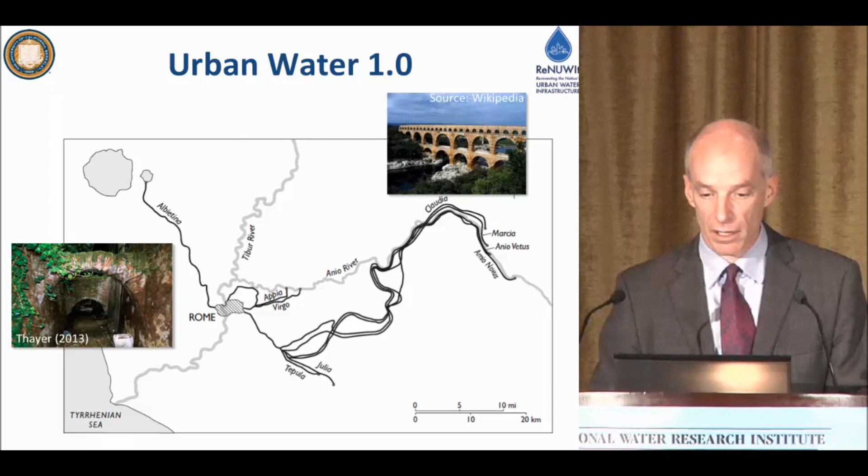When the world started getting wealthy, about 12 or 13 centuries later, they turned to this same approach of providing urban water services. So when London and Paris started growing in the 19th century, or maybe more relevant for our discussion today, when the United States started growing in the late 19th and early 20th century, we turned to the same approach of imported water and sewers.

Think about New York City and its wonderful gravity-fed water supply, with the Catskills and Croton watersheds delivering water to the city, and sewers following the Roman model, discharging waste into Long Island Sound and the Atlantic Ocean. That's very similar to the Roman system, but on a much grander scale.

On an even grander scale is the western United States, exemplified by the Colorado River, where you have the Central Arizona Project and the Colorado River Aqueduct providing water for a lot of the people who live in the American Southwest. So there's an incredible upscaling of this first version of urban water, but it wasn't all that different from the system the Romans developed.

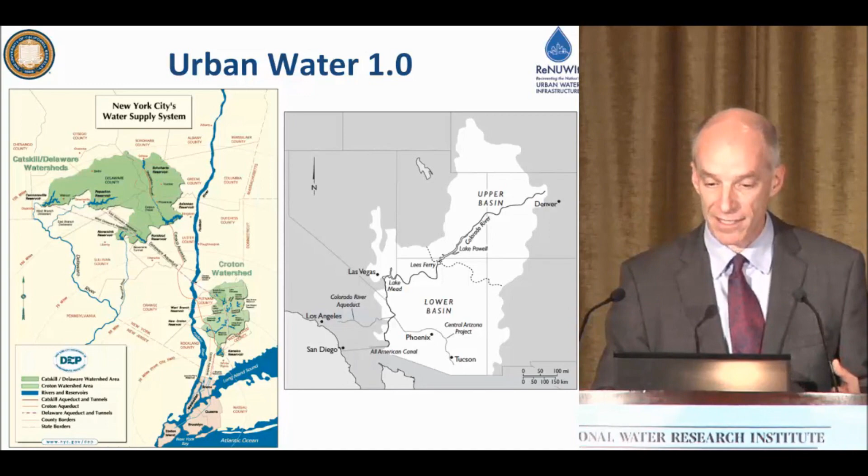So: water supply, sewage disposal, water supply, sewage disposal, water supply, sewage disposal. Eventually this becomes too dense, and the sewage disposal for one community becomes the water supply for the next community downstream.

The next version of urban water infrastructure was designed in response to the fact that people's drinking water intakes were very close to other people's sewage outfalls. There was no sewage treatment, no drinking water treatment - the upstream community discharges to the river, and the downstream community gets sick. The best example is the towns of Lowell and Lawrence on the Merrimack River in the United States. Lowell, the upstream town, discharged its sewage into the river about 15 miles upstream of the drinking water source for Lawrence, and people got typhoid fever. This was a common occurrence in the United States and parts of Europe at the end of the 19th century.

This newspaper article from the New York Times, dated 1891, shows that people realized there was an epidemic. The town of Lowell was able to find a clean water supply that wasn't contaminated by sewage, but the town of Lawrence had no such alternative available to them.

So in desperation, they did what desperate people often do - they turned to academics. The academics they turned to were the Lawrence Experimental Station, MIT's experimental station established in Lawrence, partially because it was a great place to study this problem. People like William Sedgwick, the first sanitary detective if you will, helped figure out the source of the disease outbreak. And people like the prodigy Allen Hazen, who helped pioneer slow sand filtration, developed a system for treating water.

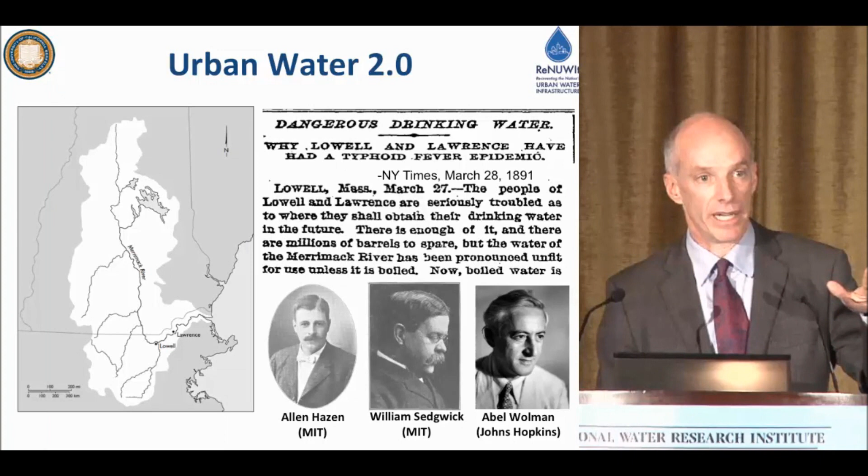Everything proceeded well until people realized it wasn't enough just to treat drinking water - all the sewage going into rivers was causing problems so bad that cities were no longer nice places to live. Near me, near Oakland, the town of Alameda saw people move away because sewage from Oakland, Berkeley and the East Bay Hills was dumped into the mudflats by the Bay Bridge. It became so hard to live with the smell of hydrogen sulfide and sewage that a solution was needed - and that solution was sewage treatment.

Activated sludge treatment - early research was done by an academic, Gilbert Fowler at the University of Manchester, who was influenced by what he saw at the Lawrence Experimental Station. This resulted in good systems for treating sewage, whether trickling filters or activated sludge treatment plants, which largely alleviated the aesthetic problems of fish kills and hydrogen sulfide associated with raw sewage discharges.

Other researchers and academics like Charles Gilman Hyde also contributed - I wasn't able to find a picture of Professor Hyde, but this is a picture of the original civil engineering building at UC Berkeley. I think it got knocked down long before present times, but you can see it here. There were a variety of people who helped spread this idea of sewage treatment as a way to solve urban water problems.

In the late 1960s and early 70s, a window opened. People became aware of the problems affecting the environment - rivers started catching on fire, and people noticed problems like DDT and its effect on top predators. A window of opportunity opened, and the Clean Water Act enabled investment in sewage infrastructure. This figure shows some of the investments made in the United States in sewage infrastructure, to a point where this revolutionary idea, which started slowly in the beginning of the 20th century, spread around the whole country and created a new way of delivering urban water services.

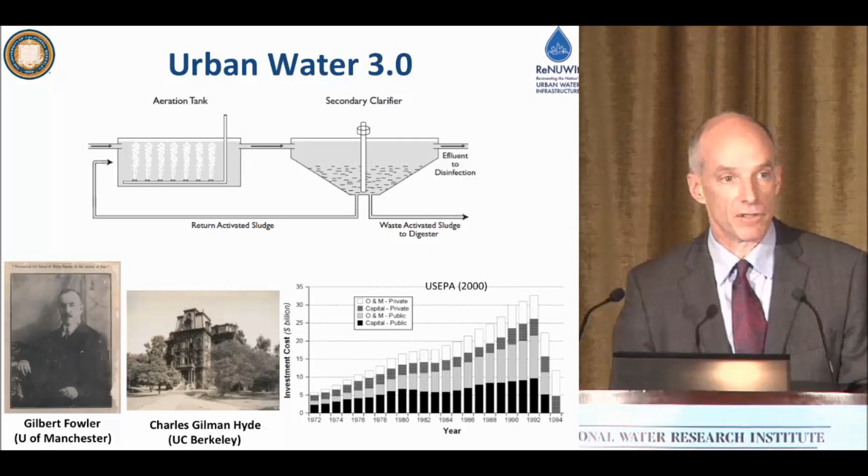So here we are in the 21st century, and I'm making the argument that we're due for another revolution. I want to tell you a little bit about the reasons why I think we're heading towards another revolution.

The first one is climate change. I don't want to steal Jerry Schnoor's thunder, he'll talk to you a little bit later about climate change.

But in a nutshell, the reason climate change is an issue is that it's going to become wetter in the places that are wet, and drier in the places that are dry. This figure here shows a map from the latest IPCC report showing where the changes in precipitation patterns are going to occur. In the western United States, the precipitation patterns that give us our winter precipitation are going to move further north, meaning the southwest and southeast of the United States is likely to become drier.

Australia is likely to become drier. The Mediterranean countries are likely to become drier. Other places are going to become wetter, but there's certainly going to be a water supply issue. You can see here in this figure from last week from the drought monitor in the US, the dry conditions in the US, and maybe some of you remember the dry conditions in Texas last year.

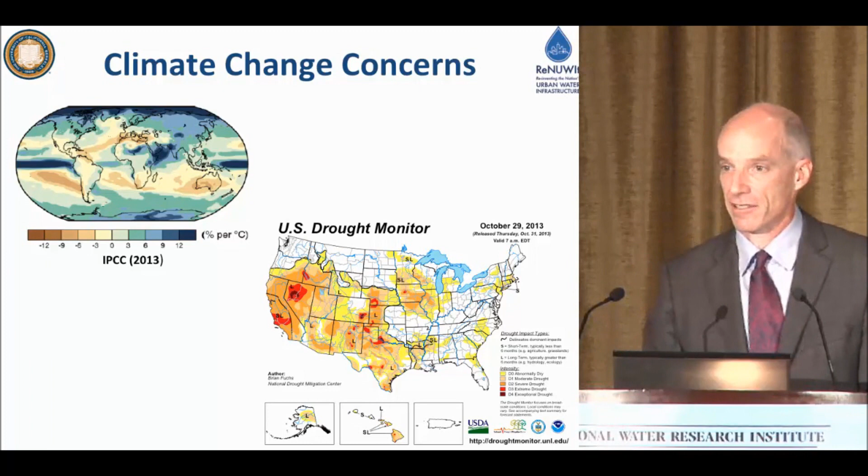Another driver for a change, a revolution in urban water systems, is what I'd characterize as resource considerations.

This map shows you from the U.S. Global Change Research Program population changes, and the map shows in blue the areas where population's decreasing, and in orangey red the locations where population's increasing. What you can see is that in the United States the population's moving to the dry places. It's moving to Florida, it's moving to Texas, it's moving to California and the Southwest.

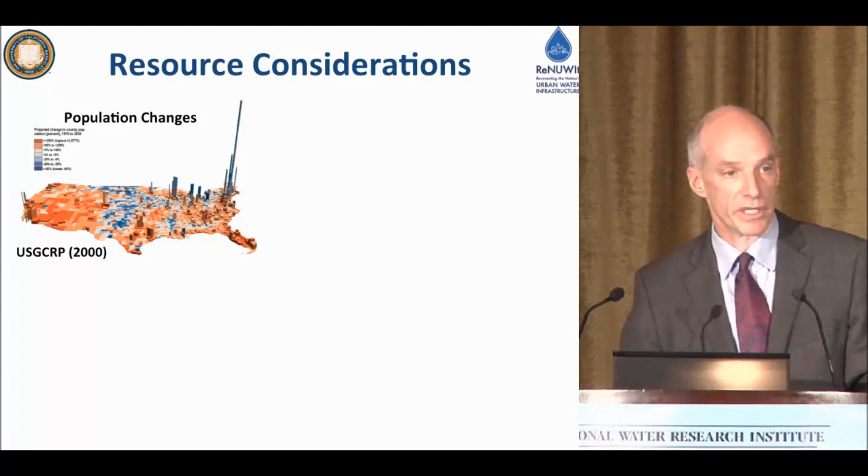There's a new concern, new interest in reducing greenhouse gas emissions. A lot of the urban water systems that were developed during a time when energy was inexpensive and we weren't too worried about carbon dioxide emissions are coming under scrutiny.

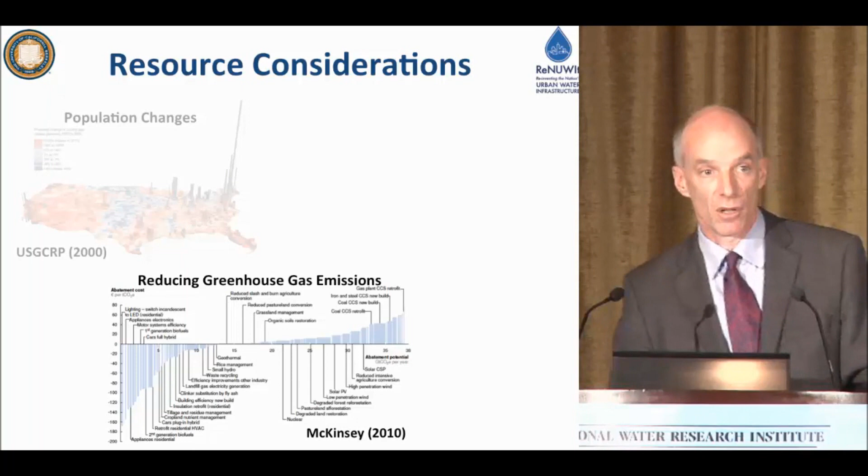This is the famous greenhouse gas cost curve from McKinsey that mainly deals with the energy sector. But we could imagine similar cost curves for the water sector. Suddenly pumping water up into Southern California or up to Tucson, Arizona, becomes low-hanging fruit in terms of lowering our greenhouse gas emissions. If we could reduce the amount of water that we have to pump way uphill, we have ways to reduce greenhouse gas emissions. So there's a good motivation there.

Water supply and sanitation is a public service. It should remain that way, it shouldn't be farmed out to the private sector. And the ultimate objective is to be safe and reliable. I think many of us have built our careers around that objective and take the engineer's approach.

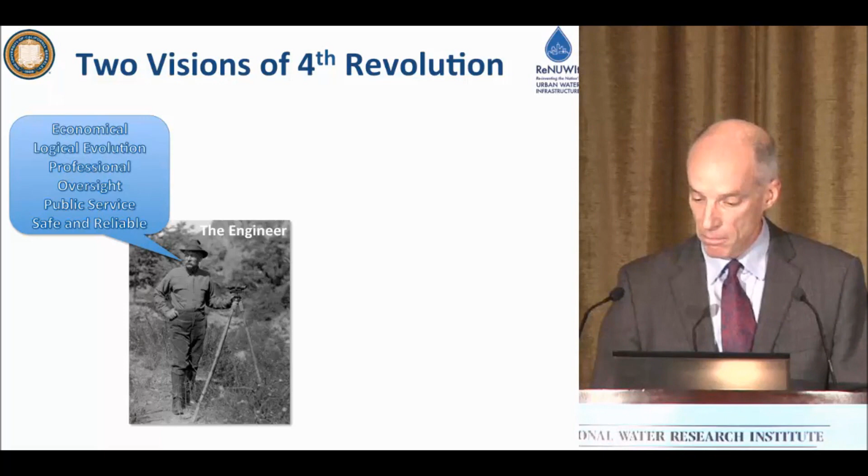But there's this other vision of urban water infrastructure, exemplified by the architect and planner Le Corbusier. This school thinks a little differently. They think the solution to urban water infrastructure issues involves distributed systems, making individual buildings or individual blocks of houses autonomous and able to treat their own sewage and provide their own water. They would advocate for this because it provides a resiliency that you don't see in centralized systems. Instead of thinking it's a logical evolution, they would say it's a much-needed revolution.

They would look towards the grassroots support of the public, and anyone who's dealt with the public on issues like gray water or household water supply and low-impact development would realize there's more support among members of the public for this approach to water than there is for the large centralized system.

They would tout the independence of the system and the fact that it gives people control of their own destiny. And they would talk about its flexibility and its ability to evolve in the future.

So what I want to do is spend a little time showing you primarily this centralized vision and how it's being realized here in California, giving you a few examples of the front lines of the revolution, and what we could expect to spread to the rest of the country through the result of the innovative work of some of the people here in this room and others.

And then I also want to talk about this other view and the ideas that have been proposed, and maybe they're not as far developed, but I want to show you what they are. And I want to end by thinking about how these two visions can come together.

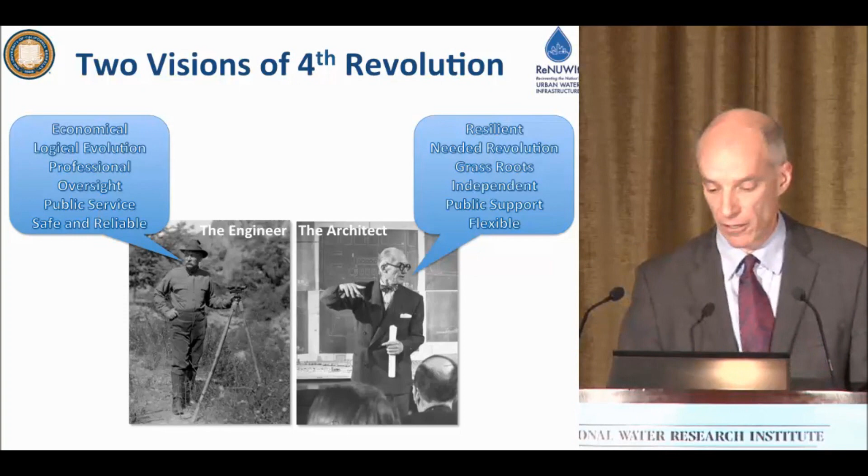So here's the current system that we have. I'd call it Water 3.0, the centralized version. This is what Glen Daigger, the president of the International Water Association, calls the take, make, waste linear approach to water supply. That is, you take imported water into the system, you put it through water treatment, Water 2.0.

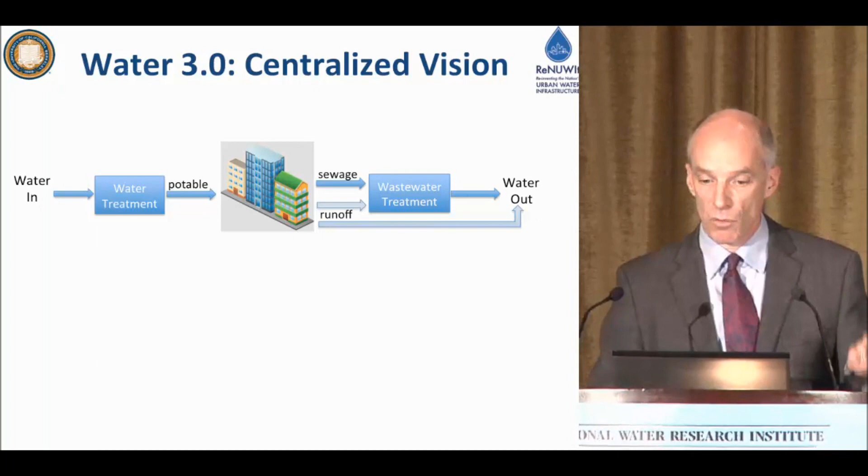You use it in the city, only one flavor of water, potable water, gets used for absolutely everything, and then it becomes sewage. That sewage goes to a wastewater treatment plant, Water 3.0, and then it gets discharged to the environment. And if the city got rain in it, then there's stormwater runoff, and maybe that runoff goes into the wastewater treatment plant, a combined sewer system, or maybe it bypasses the wastewater treatment plant and becomes a separate sewer system.

When we talk about the next version of water, Water 4.0, the centralized version has a lot more arrows on it. It looks a lot more complicated. But the general idea is that water gets recycled in a loop.

So let me show you some of these loops. First of all, we don't call them sewage treatment plants anymore, do we? We call them resource recovery facilities because that's what they do. They recover resources. And sometimes when they recover those resources, they return them directly back to the city as non-potable water, or sometimes they return them to the city as potable water, so-called direct potable reuse.

Or maybe they discharge them to an aquifer, and we manage that aquifer - soil aquifer treatment, aquifer storage and recharge, recovery, whatever you want to call it - and we send it back to the water treatment process and it goes back into the city as the potable water supply, or maybe it gets used within the city for non-potable applications.

And we also could discharge it to managed surface water. We don't just ignore the surface water, but we consider the surface water part of the infrastructure - engineered treatment wetlands, managed hyporheic zones in rivers. These systems become part of the treatment system and can either be used for pre-treatment before going into a managed aquifer, or maybe even like for example, in the Tarrant Regional Wetlands in Texas, into a reservoir for a drinking water treatment plant. That's the centralized version.

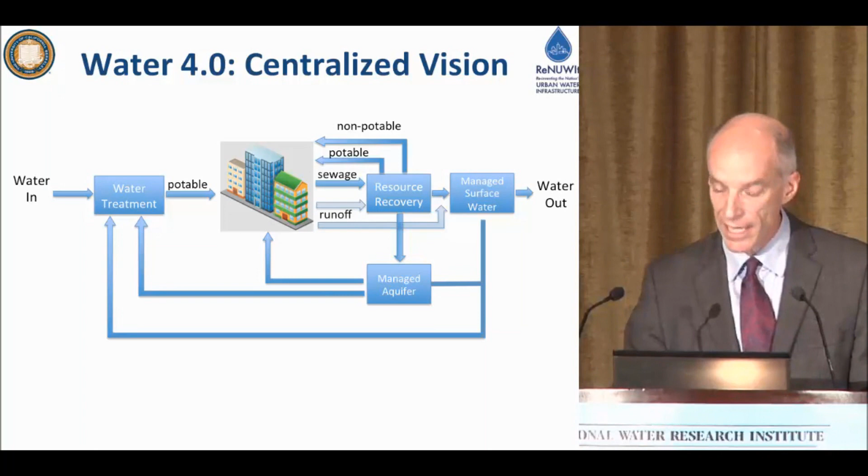Let's see a few examples of the centralized version. Here's an example close to home for me. It's in Oakland. So EBMUD, the local utility - if you've ever driven over the Bay Bridge, it's the treatment plant right in the middle of the cloverleaf there. East Bay Mud, they're not very worried about their water supply.

They have an adequate water supply, but they're looking to recover energy. And they had excess capacity in their anaerobic digesters, and so they got this idea of bringing in organic waste from other industries and other applications and converting it into biogas.

So this figure here shows you the progress they've made in producing energy. By bringing trucked waste, winery waste, slaughterhouse waste, all kinds of organic matter, household compost even they're experimenting with, by bringing that into the treatment plant, they're able to provide about 90% of the electricity they need to run the sewage treatment plant. And they have plans to bring it up to 100%. That's part of this resource recovery part. It's no longer just a sewage treatment plant, it's a resource recovery facility.

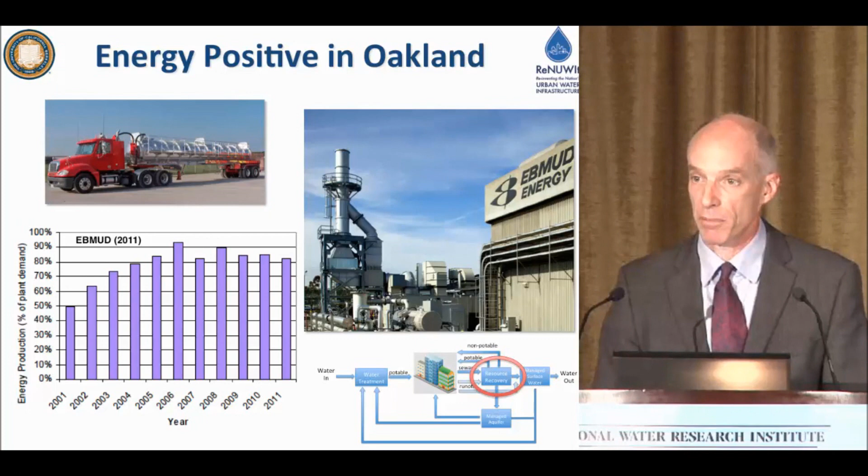Closer to where we are, by the Los Angeles airport, you might find West Basin's Edward C. Little water recycling facility. This is a really interesting water recycling plant that does something I'd refer to as tailored water.

That is, it produces 5 different flavors of recycled water. It produces irrigation water, so-called Title 22 water for landscape irrigation. It produces water after reverse osmosis that can be used for groundwater recharge, but it also produces 3 different kinds of industrial waters. It provides water for cooling towers, and uses reverse osmosis to prepare water for low pressure boilers.

It even produces a little more treatment to prepare water for use in a nearby oil refinery. The interesting part about this facility is that as the needs of different customers change over time, it can change its mix. So it's not held hostage to just landscape irrigation or just one kind of cooling water. If the community needs less landscaping water, that's okay—more water can go to one of the other needs.

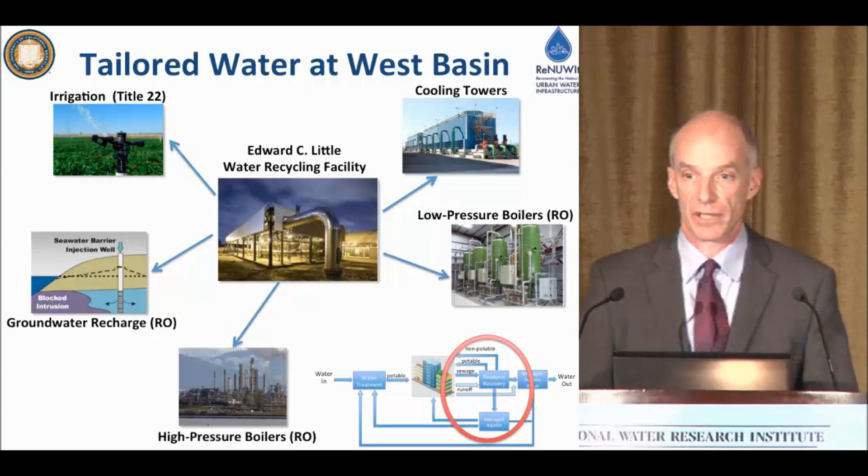Now here, closer to where we are today, is the Santa Ana River, and here's an example of a managed aquifer. Along the banks of the Santa Ana River are the Anaheim Lakes, right about here. What the Orange County Water District does is route water from the main channel of the Santa Ana River into the lakes, and the water percolates into the aquifer.

It becomes a drinking water supply for the nearby community. The aquifer and the microbes associated with the sand during infiltration are part of the treatment process. That Santa Ana River, right there in Anaheim, in the summertime, is essentially 100% wastewater effluent. So it's a potable water recycling project using a managed aquifer as part of the treatment.

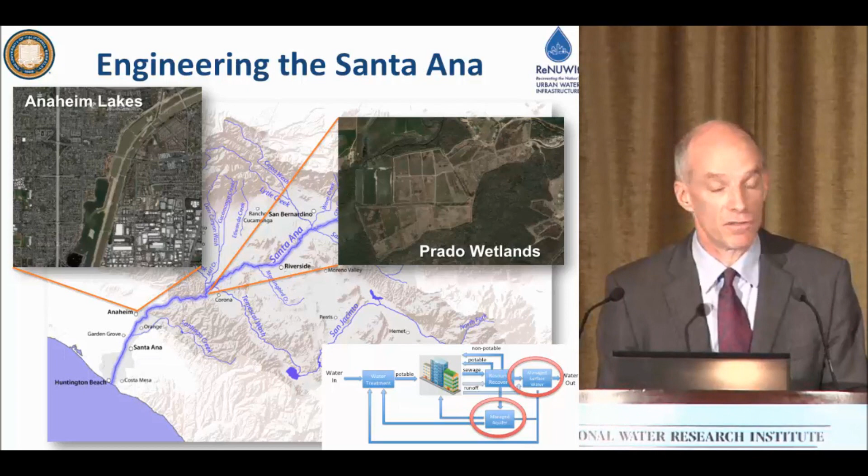Now further up the Santa Ana River, you can find the Prado Wetlands. The Prado Wetlands are an example of a managed surface water. This is a facility that was developed behind a dam, put on the Santa Ana River to protect the lower part of the watershed from flooding, and it became very popular with duck hunters and everything was fine.

But at some point, Orange County Water District realized they were running into problems with high levels of nitrate in the Santa Ana River, because after all, it was the sewage discharge from Riverside, San Bernardino, and the Inland Empire communities. Working with my colleague at UC Berkeley, Alex Horne, they designed a series of vegetated wetlands, and those wetlands did an excellent job removing nitrate. So part of the managed surface water improved the water quality by removing nitrate through denitrification and making the water safe to drink.

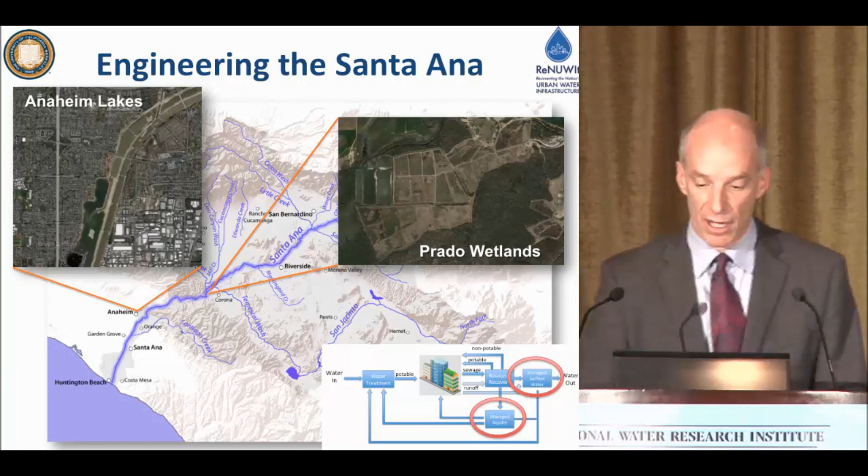We found that if you don't let rooted plants grow and you leave the water at about 30 centimeters depth, photochemical reactions and a unique type of microbial community that develops at the bottom of that sunlit water column do an excellent job removing trace organic contaminants. We were seeing removal of pharmaceuticals and personal care products an order of magnitude better than what we were seeing in the vegetated wetlands.

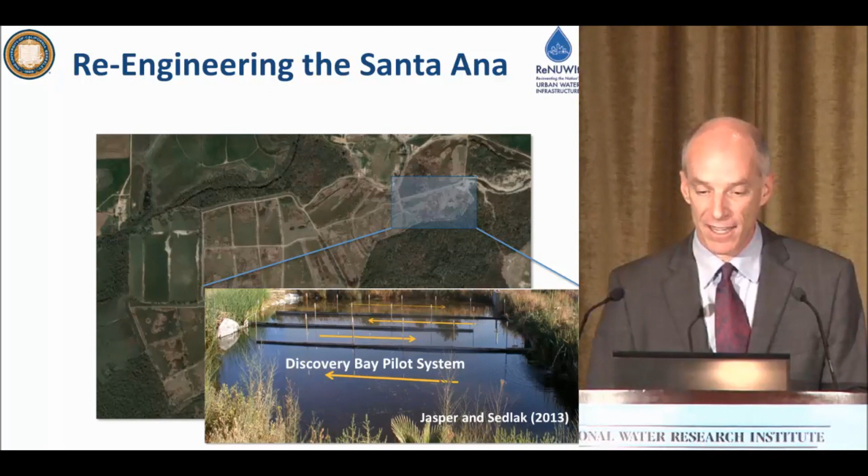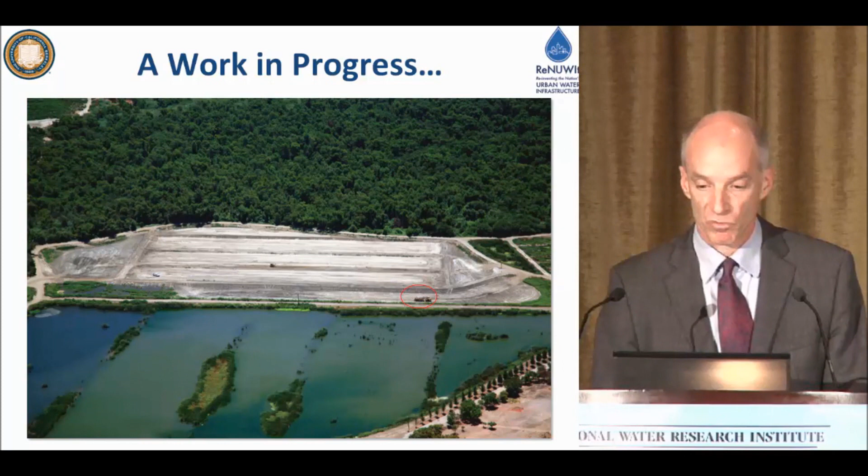I heard just yesterday that this is going to be filled with water on Monday and used as a way for removing trace organics in the Prado wetland system. Okay, let me turn to think about this decentralized version of urban water systems.

When you hear about this decentralized version, you might see something like this. This is the kind of idea that Peter Wilderer pushed, or that Rolf Otterpohl in Germany talks about. You can take a house and make that house an off-the-grid house, and that house can do all kinds of wonderful things for you.

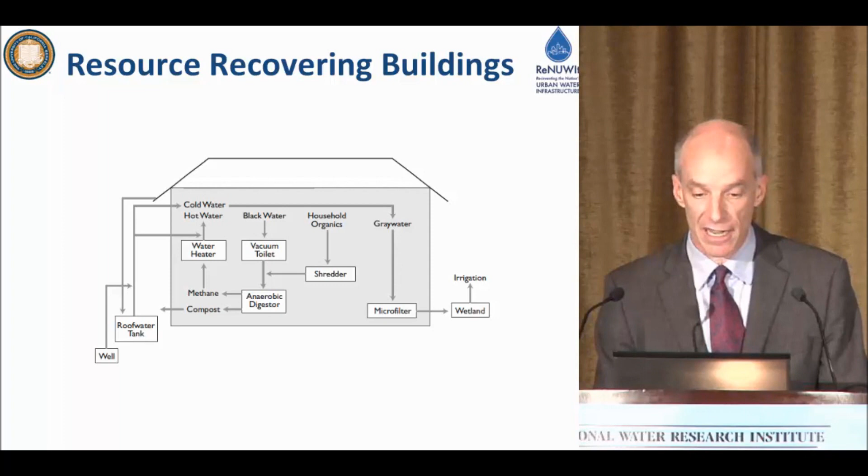For example, you could replace the normal toilet with a vacuum toilet, put the food waste from the house into an anaerobic digester, and in a miniature version of what happens at the East Bay MUD Treatment Plant, make your own biogas.

Let me see if I go backwards here. Somehow that got pushed. Help me.

Somehow it went forward. Sorry, I'll just go with it here.

You can make your own biogas, and that biogas can be used to heat water. Then you could capture the roof water and use it as a drinking water supply. And you can have a separate gray water stream and use that for landscape irrigation. So that's one version of a decentralized water infrastructure where you take a house and take it off the grid and make it work for you.

Those systems are still quite expensive, and people say they may not be practical because you can't get rid of all the water in the wintertime, or you have to put a lot of effort into managing them. But they're one approach for taking a house off the urban water system and having a different vision of the fourth generation of urban water.

Maybe that's a little far-fetched now. Maybe the technology isn't there to build those kinds of houses. Here's something a little more practical and down to earth: this is a membrane bioreactor. In the center of this figure, you can see... oh, golly.

This is a membrane bioreactor that's being operated at Colorado School of Mines by our colleagues Tzahi Cath and his students for a while now. That membrane bioreactor treats the wastewater from a student dormitory.

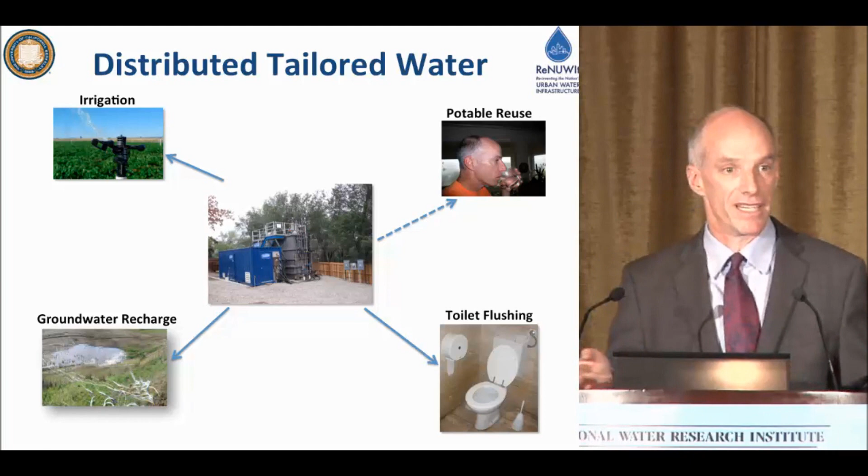So what you have there is a vision of breaking the house off the grid and doing all the kinds of things we do in the large centralized system, but in a smaller footprint. And that has real advantages because you don't have to pump the water around the city crazy distances. You could reuse it right where it's produced.

The other kind of distributed water infrastructure we hear a lot about is green roofs, or green streets, or low-impact development. Whatever you want to call it, it has a lot of applications and a lot of proponents. In the eastern United States, the upper Midwest, and the Pacific Northwest, where there are a lot of combined sewer systems, instead of building sewage bypass tunnels, people have been investing in bioswales, green roofs, and cisterns that collect water.

Instead of taking a centralized approach to solving the problems of combined sewer overflows, this distributed approach can be used. Sometimes it's more expensive and sometimes it's less expensive, but in all cases it has a lot more public support than digging big concrete tunnels throughout the city.

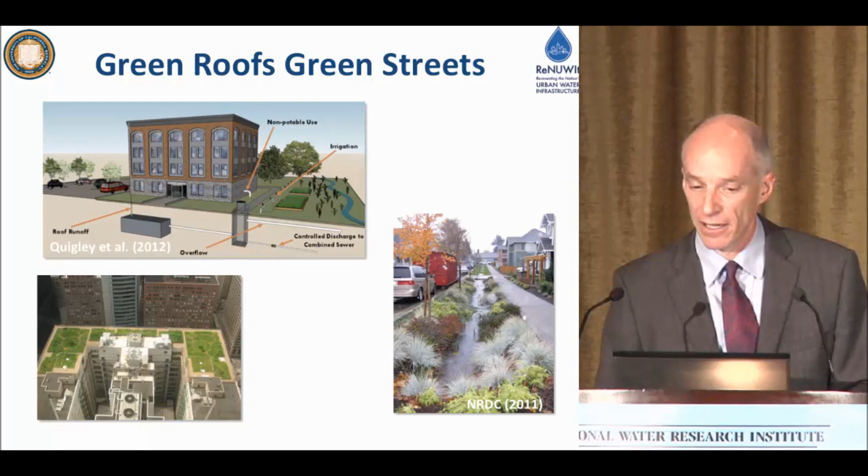So we've got these two visions: the centralized vision, which is the one we're all part of and have put a lot of our energy into, and the distributed vision, which either posits taking houses off the grid or reusing water close to where it's produced, or solving urban drainage problems through these delocalized solutions. So why don't they agree together? Maybe the problem is that we've been looking for solutions in the wrong places.

Think for a moment about the different niches where this decentralized approach might be more practical. Think about a rural community. Rural communities are off-the-grid houses. They use a 19th century technology of a septic tank and a drain field. They use local groundwater as a drinking water supply, and they handle their stormwater with drainage ditches. So if we can run a water supply for a rural community on 19th century technology, imagine what we can do with 21st century technology. I think we can make these systems function at a lot higher density than what they currently work at.

So think about the suburban communities on the edge of the city. With a modernized version of distributed water treatment, they could become practical.

Why do people upgrade from this distributed form of water treatment to a centralized one? Well, they can no longer acquire enough water and dispose of the sewage that they have. So you think: if we can reduce consumptive water use in the house by 70%, by eliminating outdoor landscape irrigation with potable water and doing the best we can with reducing potable water consumption through conservation, suddenly the water demand's a lot different.

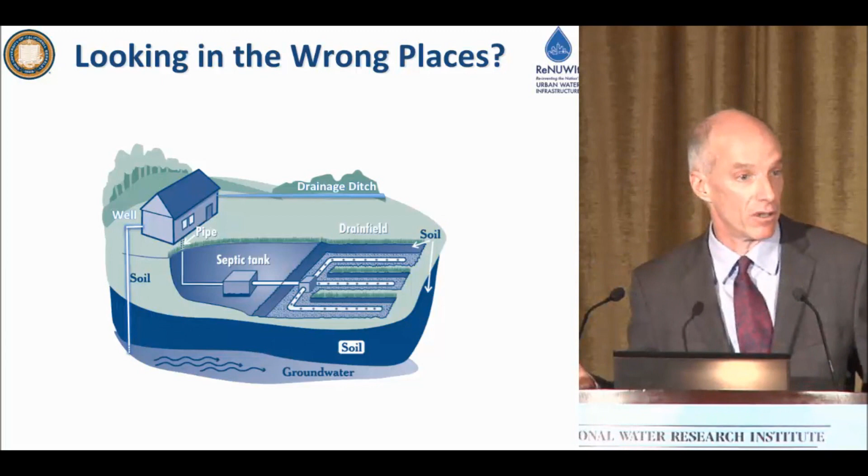You could provide water through a combination of shallow groundwater and roof water collection. And suddenly you're generating a lot less wastewater that needs disposal. And these solutions look good not just in rural communities, but in suburban communities. After all, when you look at a city and the way it's laid out, not every place is densely populated like downtown San Francisco, Manhattan, or downtown Chicago. Most places look like Orange County, where there's a lot of open space between the houses.

So, a path forward. I think the time has come for us to start getting more serious about this second vision of urban water infrastructure. The people who push this second vision need to start talking to the people who've put a lot of thought into centralized water infrastructure, and I see them working together. In the centralized core of our most densely populated cities, there's a role for this fourth generation of centralized urban water infrastructure. We see it playing out here in Southern California, and we see the benefits it offers us.

But this other vision of urban water infrastructure, the little red circles with different approaches, has a place too. It's obvious to me that one place is on the edge of our cities as they develop out, as we think about greenfield developments and redevelopment on the edge of cities. But there are other places we haven't even thought of yet, and other benefits they might give a city.

For example, think about it this way: if someone built an off-the-grid housing development in a city with a combined sewer system, that's that much less water going into the already overburdened pipes of the city. So why would you ever let anyone build a new community in a place with a combined sewer system and allow them to hook up to the centralized infrastructure? It's got to be less expensive to find a way for them not to put an additional burden on that wastewater collection system. These kinds of thoughts, I think, will become more important as we think about building out hybrid systems of centralized and decentralized water.

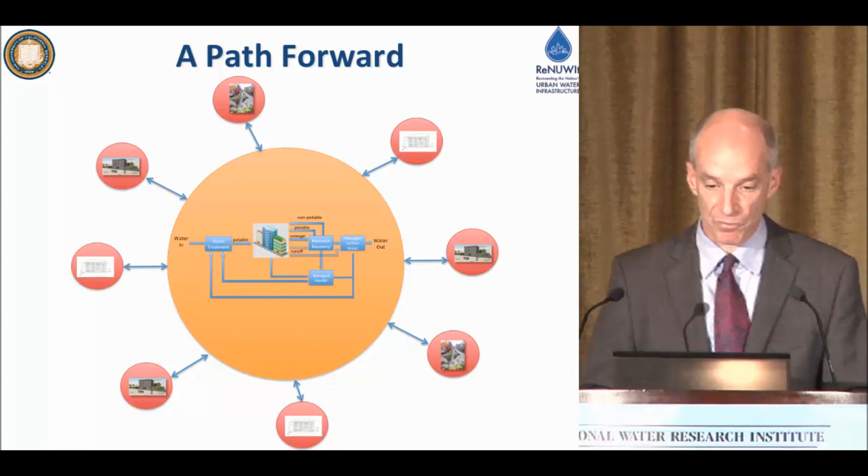So, some final thoughts. I think the time has come to start preparing seriously for the fourth revolution, because there are a lot of drivers that are going to take us there. Think about climate change: even if we solve our problems with greenhouse gases tomorrow, we've bought into a certain amount of climate change, and we're going to see changes in our water supply availability. We're going to see changes in population, and a continuing pattern of underinvestment in urban infrastructure. So there's a reason to prepare for the fourth revolution, because it's coming.

I think there are things we can do. Priming the pump is one of them. If you look at the previous revolutions, it was a crisis which created the need for a revolution, and the technology had to be there. Those technologies that often end up being the practical ones at the end of the day aren't cheap at the beginning. They need time for experimentation, and time to become less expensive. Think about seawater desalination 30 years ago - it was impractical, way too expensive. Now it's probably a better option than pumping more water over mountain ranges, and people are starting to build desalination plants around the world. So a 20 or 30-year time for development is needed, and we have to prime the pump - we're not doing enough pump priming.

We also have to think differently about the way we do city planning. I think we have to think about what I would call no regrets planning. If you see the future of urban water being a stronger wastewater stream as water conservation comes to bite, more water recycling and resource recovery, hybrid systems of centralized and decentralized systems, you have to start planning differently. You have to think about the way you invest in infrastructure, because those investments have lifetimes of 50 or 100 years. We also have to be ready for windows of opportunity.

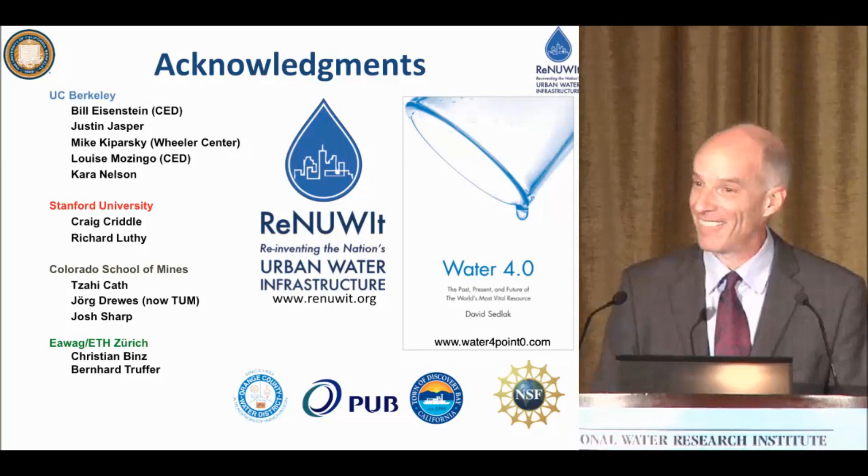Harvey: A brief comment, David. I appreciate the thought that has gone into this, and I wanted to give you a little experience I had, because I think we're going to have to bring in the local health departments here in priming the pump. I built a home in Fort Bragg, California 2 or 3 years ago, and I proposed the use of gray water to irrigate the shrubbery around the house. I went to the local health department, and they would only approve it if they put a provision on the title, and I would have had to pay for annual inspection fees. I was afraid it would hurt the resale.

I declined their offer, and I went with a conventional septic tank. I think that's true, Harvey, and you see that. I think it's just in the last year or two that the gray water regulations in California were updated. So I think there's attention going into that, but it's definitely a work in progress, and we could do more with the regulation side to enable distributed treatment.